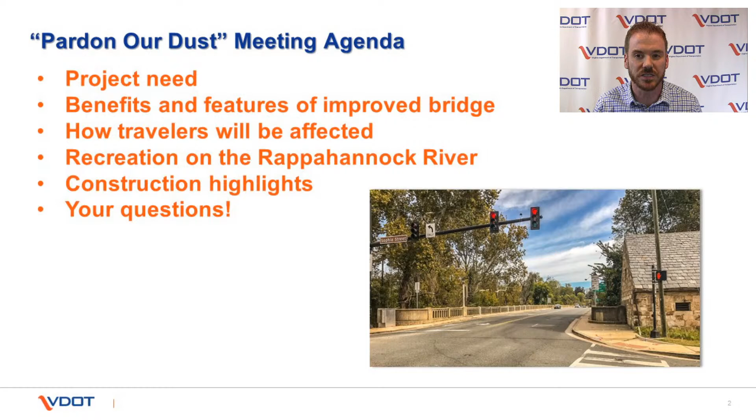To start out with, the Chatham Bridge is approximately 79 years old, carries 16,000 vehicles per day, has 4 lanes for the traveling public, and has 2 narrow 4-foot sidewalks in its existing condition. The bridge is currently considered structurally deficient, which means it has a very high maintenance cost due to some raveling and other issues with the asphalt surface on the bridge and the deck. This has necessitated the need for an accelerated superstructure replacement.

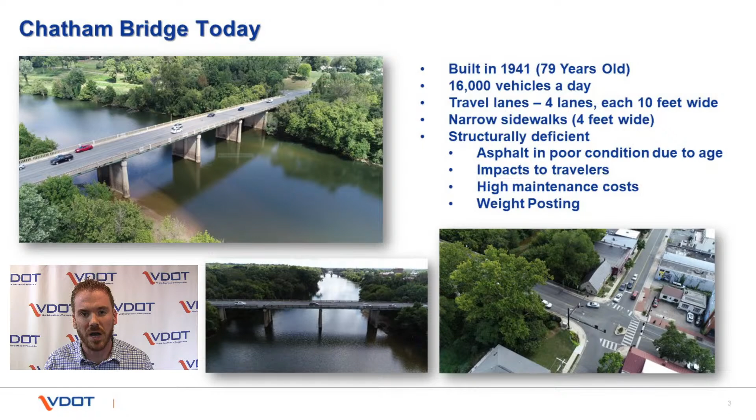What is a superstructure, you might ask? The superstructure is the top of the bridge extending up from the beams underneath, up through the concrete deck and walls. We'll be replacing all of this with that project and doing some repairs to the underlying foundations of the bridge.

This is an overview aerial of the project. You can see here that we'll have 4 lanes, and we'll be adding a widened shared use path for pedestrian and recreational traffic. This shared use path will connect the Belmont Ferry Farm Trail System in Stafford County into the City of Fredericksburg, allowing safe, effective access for pedestrians and recreational users between the 2 locales. Additionally, this project reaches from the William and Sophia Street intersection to the intersection of Kings Highway, Route 3, and River Road.

One thing our Stafford County users and users of River Road might notice is that we have a pork chop island shown on that end of the plan. That pork chop island will limit access out of River Road at the completion of the project to a right-in, right-out only. During construction of the project, as we'll discuss later, River Road will not be able to make left turns as the Chatham Bridge will be closed, or will not be able to make right turns as the Chatham Bridge will be closed.

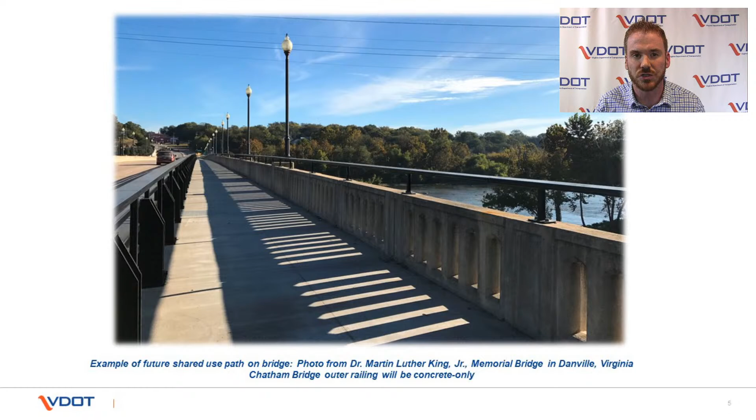Here you can see an example of the proposed bridge with an example from Danville, Virginia that VDOT constructed with a shared use path. You may notice the metal rail on the left-hand side, but the Chatham Bridge will feature a concrete rail that matches the existing historic aesthetic of the bridge, so don't worry about that metal rail.

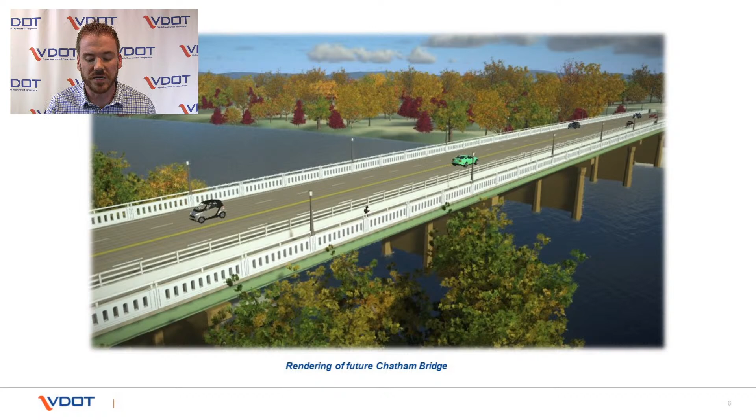Here you can see an aerial model of the bridge consisting of the shared use path and the four travel lanes. This is another rendering of the proposed bridge looking into the Stafford County side. And here's a higher level aerial demonstrating the underlying substructure that will remain and the replaced superstructure.

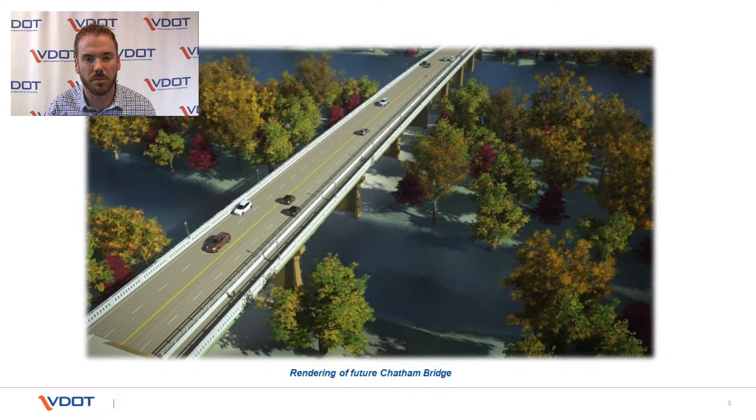Here's our project schedule. As many of you know, we have already completed the Dixon Street ramp improvements and installed some detour signage in the city of Fredericksburg. This work has been completed, and we thank you for your patience in helping us complete that so we could expedite the beginning of this project. This will allow the contractor to immediately get to work on the bridge, with only limited amounts of work left to do to get the detour underway.

You'll notice that utility relocation has occurred over the last couple of months in the city of Fredericksburg, and we really want to thank the businesses and citizens who have been patient and worked with us as we've continued those relocations. They are nearly complete, with the last of the fiber splicing work being completed by June 15th.

In the interim, between now and then, roadway users in the Sophia Street and George Street areas can expect some intermittent lane closures for fiber optic splicing crews still accessing manholes to complete the splicing work. You'll notice that construction activity, our notice to proceed, is slated for May 28th of 2020.

That notice to proceed will not be the bridge closure. At this time, you're going to see crews beginning to construct the access road and the causeway on the river. What's a causeway, you might ask? A causeway is a stone roadway we're going to build across the Rappahannock River to allow access for cranes and construction equipment to help rebuild the bridge.

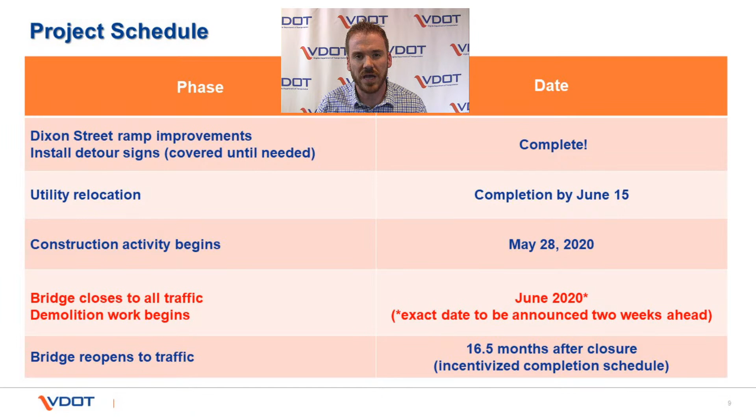The detours, as we've constructed them: for folks coming into the city of Fredericksburg from points east of town, you will use Blue-Gray Parkway and come to the Dixon Street ramps leading into the city. This is Route 2, where we've done ramp improvements to facilitate a right-hand turn into the city of Fredericksburg.

It's important to note that for this detour, we do not want traffic with a height over 13 feet 6 inches going down this route. This detour route is slated particularly for passenger car and light truck traffic.

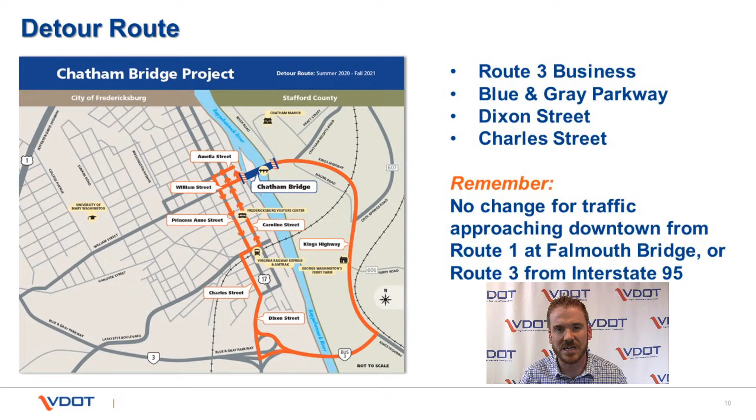Larger vehicles over 13 feet 6 inches should proceed further down Blue-Gray Parkway to the William Street intersection and proceed into town. This is due to a height restriction within the city of Fredericksburg underlying the Virginia Railway Express and Amtrak rail tracks. Larger trucks will not be able to pass through the Dixon Street detour and will need to use William Street to access the city.

Once in the city, those trucks can either exit on the two-way section of William Street or exit on Princess Anne, extending out to Route 1.

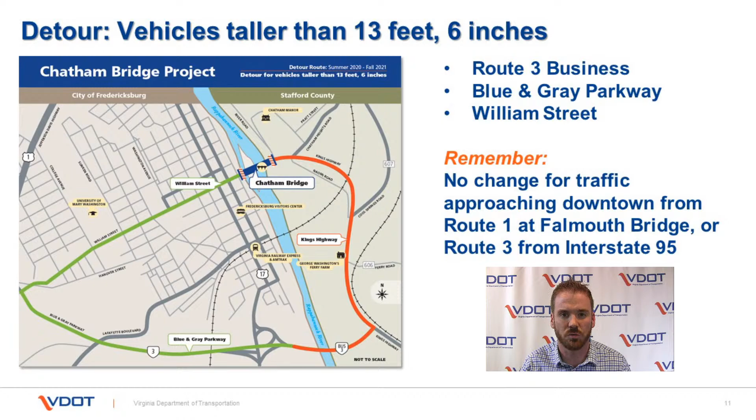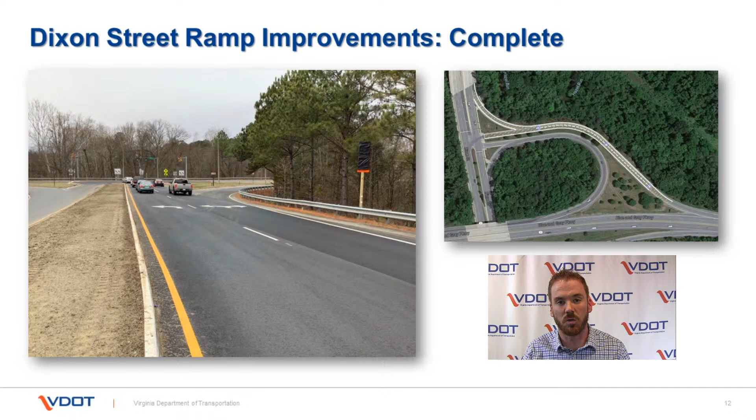Here you can see the Dixon Street ramp improvements completed. We built an extra left turn lane that's going to increase storage capacity and allow vehicles heading into the city of Fredericksburg to get to that free right turn heading into the city. This will facilitate more expedited traffic flow during peak hours, permitting better traffic operations into the city of Fredericksburg.

Here you can see Hanson Avenue and Route 1 traffic pattern changes at the Princess Anne Street and Route 1 intersection. We've had a lot of questions here, and I want to emphasize that Route 1 traffic and movements other than left-hand turns onto Hanson Avenue will not be impacted. In fact, travelers on Route 1 northbound and southbound should see improvements, as we will be removing phases from the signal, including the through and left movement from Hanson Avenue to Princess Anne and Route 1 northbound respectively, and the left-hand turn from Route 1 northbound onto Hanson Avenue. Removing these two phases will facilitate expedited access for Princess Anne Street as well as through movements for Route 1.

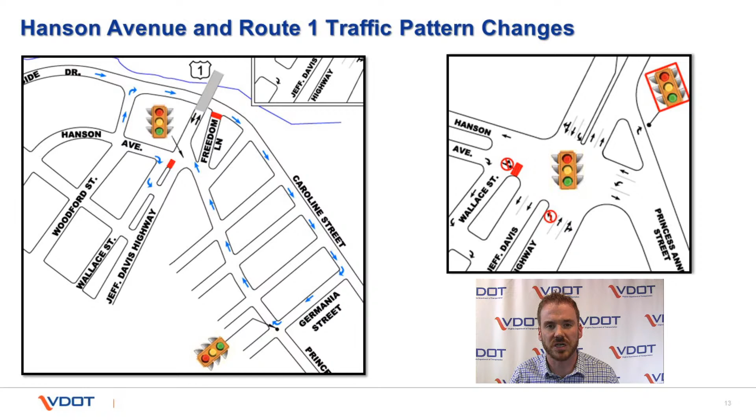Now you may be asking, well, what if I'm coming from Hanson Avenue and need to reach the city? Before you reach Route 1, you would make a left on Woodford Street and proceed to Riverside Drive, taking Riverside Drive under the Falmouth Bridge to Germania Street, looping back with a right on Princess Anne and coming back to Route 1. We refer to this as a jug handle operation. This will remove the Hanson Avenue traffic from the Princess Anne intersection while also facilitating easy access to Route 1. Hanson Avenue traffic can also divert to other intersections, including Fall Hill Avenue and other side streets leading to Route 1.

This will be phase 1, extending from June 2020 to approximately December of 2020, to facilitate some of the initial demolition work on the bridge.

As we move into the phase 2 causeway, you'll see a small change where we remove the one span of causeway near the Stafford County side and move that over to the Fredericksburg City causeway, making one contiguous causeway all across the side channel of the Rappahannock, Scotts Island, and one span and a little bit more into the main channel. It's important to note that the deepest part of the main channel, between piers 6 and 8, will remain open during this phase.

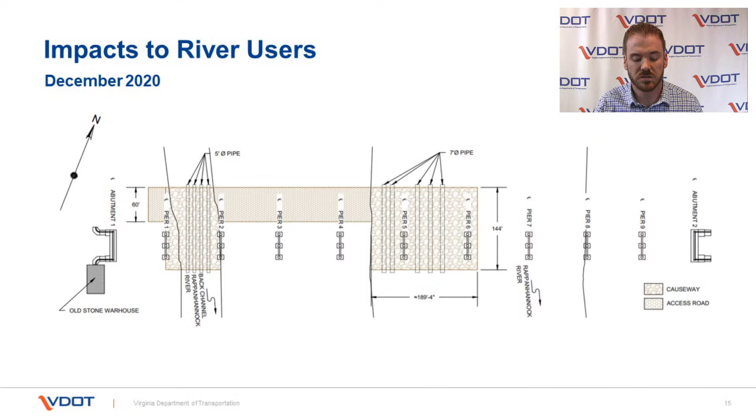We feel it's necessary to note that there will be some short-term closures, by short-term I mean less than 24 hours, of the river to recreational access under the bridge. The reason for this will be because we're doing overhead demolition, overhead beam placement, or concrete forming work. These closures will be limited. I would expect you'd see this four or five times during the entirety of the construction project.

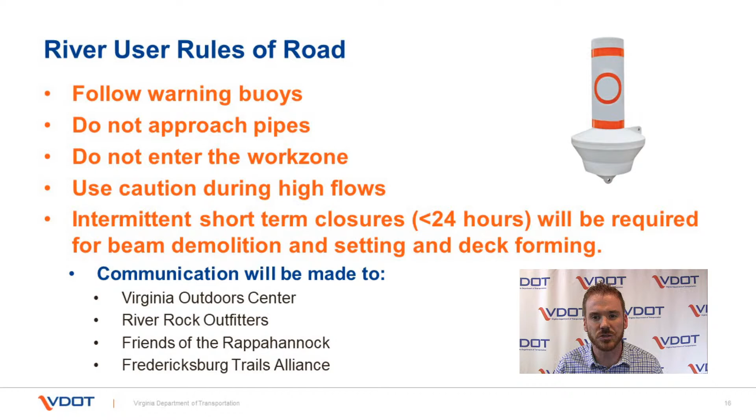As these closures come up, we will be coordinating with local organizations, including the Virginia Outdoors Center, River Rock Outfitters, Friends of the Rappahannock, and the Fredericksburg Trails Alliance, to ensure that recreational users have the information they need. Additionally, we'll be posting river status to the Chatham Bridge website and our social media pages to ensure that folks know exactly what's going on in the river when it comes time.

Now, here's where I'm going to nerd out a little bit. So when this project gets started, about May 28th, you're going to see the access road and causeway construction begin. You're going to see traffic signal modifications at Route 1 and Hanson Avenue, and you're going to see detour signage being placed throughout the city.

I want to emphasize, when the detour signage begins to get placed throughout the city, we are sensitive to users that may have concerns about the aesthetic impacts or the access of recreational users and pedestrians into their businesses. We want to make sure those folks are not impeded by our signage. As you see me and my crews going out, we will be picking locations for these signs, ensuring they are not in conflict with important commerce and economic needs within the city. If you see us out there and have a concern, please approach us and let us know, and we will do our best to accommodate.

You should see bridge deck demolition. This will be exciting, because now you're going to start to see the bridge coming down in June to July of 2020. Now, the contractors submitted an accelerated demolition plan beyond what we originally expected, so this is why we're starting the closure a little bit later, but we're still intending to deliver the project on time.

Starting in early August of 2020, you should begin to see steel beam demolition.

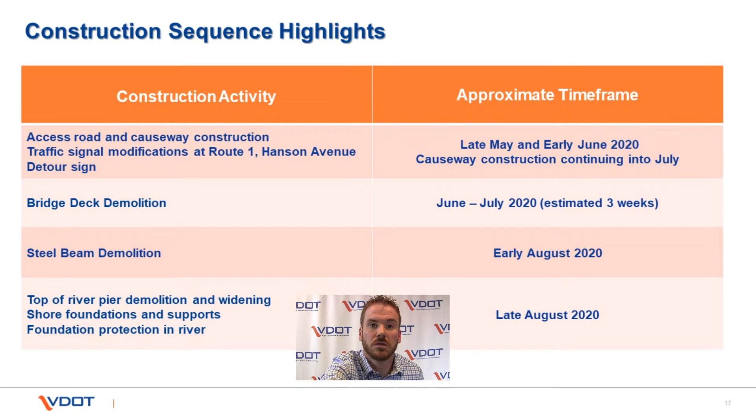Starting in December of 2020, we will have the placement of new structural steel beginning, and then proceeding into spring of 2021, bridge deck forming and placement will begin. Bridge rail forming and placement will begin in summer of 2021. This is around the time that we will have a smooth bridge deck surface for you to begin riding on, and you'll see the bridge starting to come to life. Finally, in early October of 2021, bridge deck finishing, traffic elements, and new signs will be installed, and the bridge will open in October of 2021.

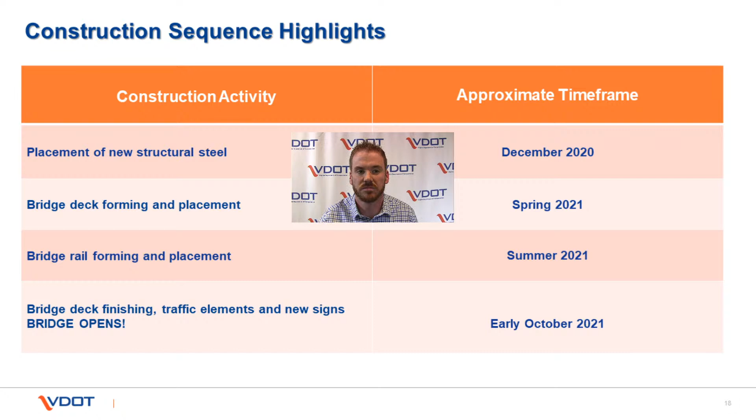Now, as we go through this, we're also hoping to mitigate some of the traffic impacts by working with online mapping providers, such as Waze, Google, Apple, TomTom, and others. This will facilitate, as it has on other projects such as our I-95 Rappahannock Crossing project, moving traffic away from the closure area and reducing impacts to the detour overall by routing traffic directly to their destinations within the city. This technology is a major improvement to our ability to work with this detour and improve the overall functionality during the project.

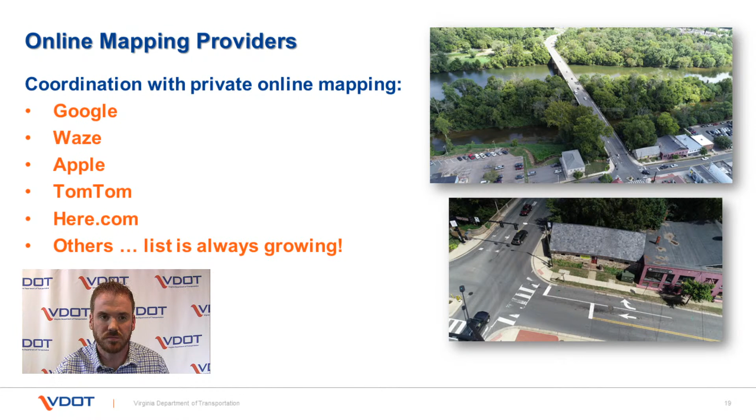And lastly, we'd ask that you stay informed as we go along during this project. You can visit us at virginiadot.org/Chatham Bridge to get additional information on the project as we go along. We'll also have some interesting live construction cameras that you'll be able to see either live streams or time-lapse photography of the bridge project in progress. You can follow us on social media at Facebook, Twitter, and Nextdoor. You'll also see tweets coming out from the field of some of the interesting activities that are occurring on the bridge so that you can be part of the construction activities.

Now with that, I want to go ahead and proceed into our question and answer session. Unfortunately, during the break, when we had to fix some technical difficulties, I did lose some contact with my folks that were helping me with questions. But to that end, I'm going to proceed through the live stream and see if I can hit on a couple of the important topics here.

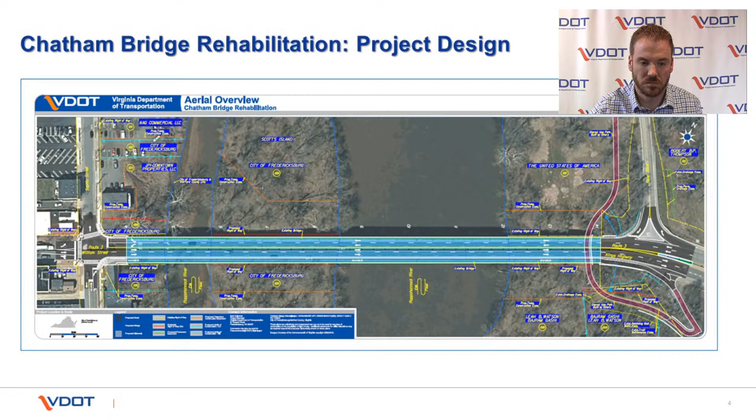Rachel Allen asks, will the pedestrian and bike path be tied to the bike path on Cool Springs? I'll have to look into this a little bit more, Rachel. At this time, I believe we are doing some improvements right along Route 3 that will permit a pedestrian crossing, not all the way to Cool Springs, but at Chatham Heights Road. I do know there are some future projects slated for the Belmont Ferry Farm Trail, and some of that is in the works about what pedestrian access will look like extending over towards the Ferry Farm area.

Linda Farneth asks, has this project remained within budget? Yes, this project has remained in budget, which is one of the reasons we've continued with this accelerated path. Having the bridge closed for 16.5 months versus a phased, longer construction schedule had major budgetary implications for this job. I'm glad you asked that question.